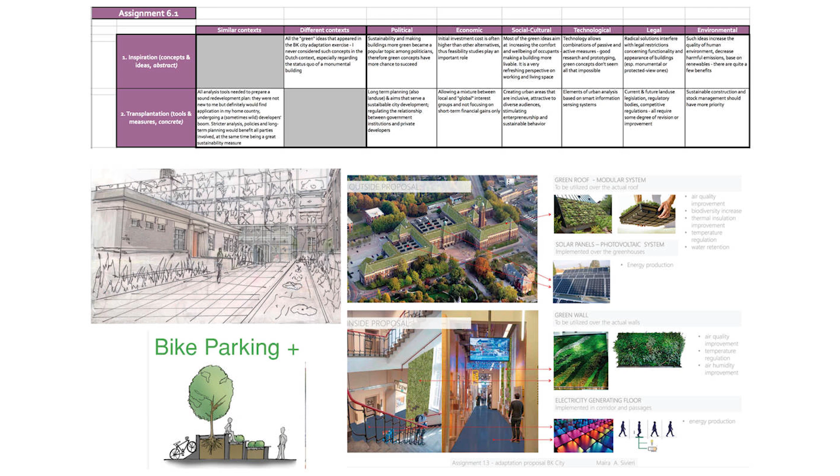Kasia Oegman was inspired by the green ideas of the BK City project, not only because they create a more environmentally friendly building and environment, but also for its social cultural aspects. It increases the comfort and well-being of occupants, making a building more livable. This user perspective is a very refreshing idea, she thought.

Marissa Yamaguchi was inspired by bamboo as a sustainable construction material. She considered this from an economic aspect, as bamboo is renewable and fast-growing, making its cultivation very economically viable. However, in Brazil it would be necessary to develop regulations and do research to determine the strength of the material for construction.

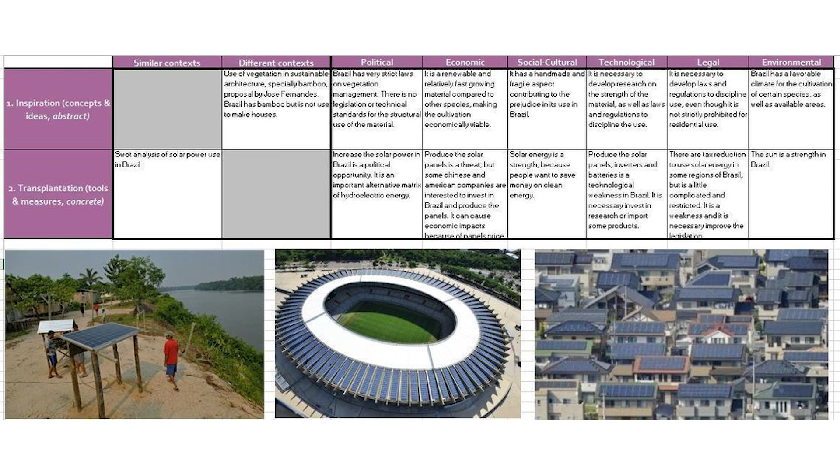Alex Tong was inspired by the adaptive reuse concept of Isabeau, who created a positive residual value with small affordable housing units. This idea could also be very interesting for buildings in Hong Kong, Alex says, where most people can only afford to rent small units. However, he thinks there are many barriers for creating smaller housing units in Hong Kong, like a stigma on living in social housing, the higher financial returns for developers when they develop large apartments, and the lack of government subsidies.

These examples clearly show that contextual differences between countries exist, but that you can still draw inspirational lessons from one place to the other.

Now let's move on to the transplantation lessons, and we discuss some of the tools that you think are transplantable to other contexts. Alejandro Pineda says the stakeholder analysis tool could be used everywhere.

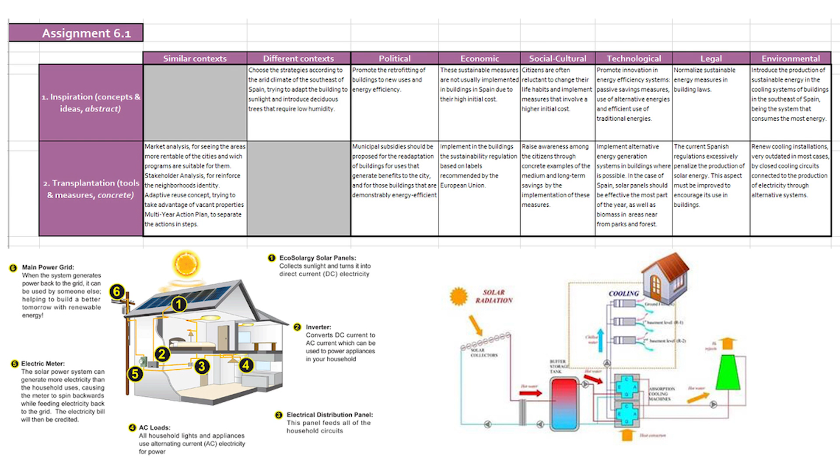He proposes that municipal subsidies and EU labels would help incentivize actors to adapt buildings. And a multi-year action plan could also be introduced to raise awareness about the medium and long-term cost savings by implementing sustainability measures in homes.

Maurizio Papa argues that the conversion meter could be implemented in Italy as well, as housing prices in the bigger cities are similar in terms of price per square meter as in the Netherlands. This is a key factor in determining how successful a conversion into housing could be, Maurizio states. But notice that housing prices often differ between cities, so also between countries.

Margarita Morales Cortes says the conversion meter could also be used in Chile. But she states it still needs to be adapted to the zoning regulations and building construction code of Chile, and the specific city plan in which a building stands.

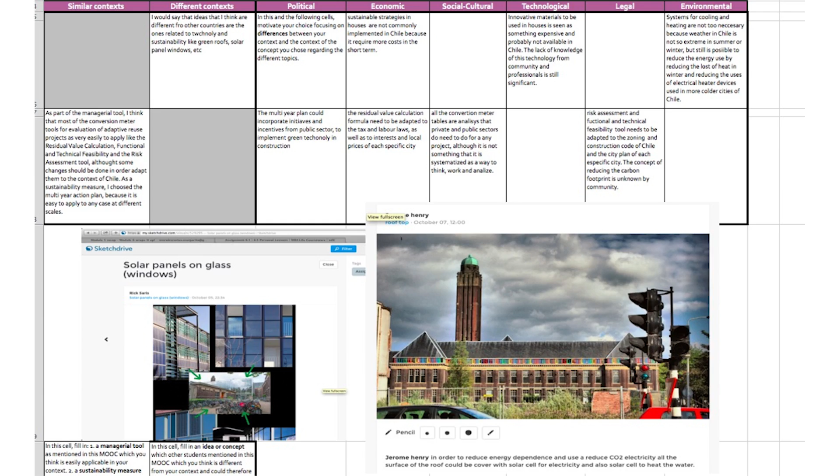We couldn't agree more. These examples exactly illustrate what we mean by using a transplanting tool from one place to another. This applies to all the tools we have introduced in this course. The principle of these tools will be adaptable in any context, but the parameters need to change and be adapted to the local context. Thank you for all the uploads for assignment 6.2.

We would first like to start with a general remark. We got a lot of proposals that included a green facade. We think this is a great idea to make our buildings more sustainable. However, we do have some side notes on this related to management.

Green facades come at much higher costs for developers, and they will need to offset those costs to homeowners or real estate investors, who do not necessarily see the financial benefits of such a measure. Also, the costs for maintenance of green facades is much higher than for a normal facade. These costs are usually initially made by real estate developers, who will need to offset them to investors or homeowners who are not always willing to pay for such measures.

The same situation occurs for solar panels. But for solar panels it's different, because nowadays in Western countries they are usually obligatory to meet energy performance requirements. We would like to shortly elaborate on a few of the submissions we received for this assignment.

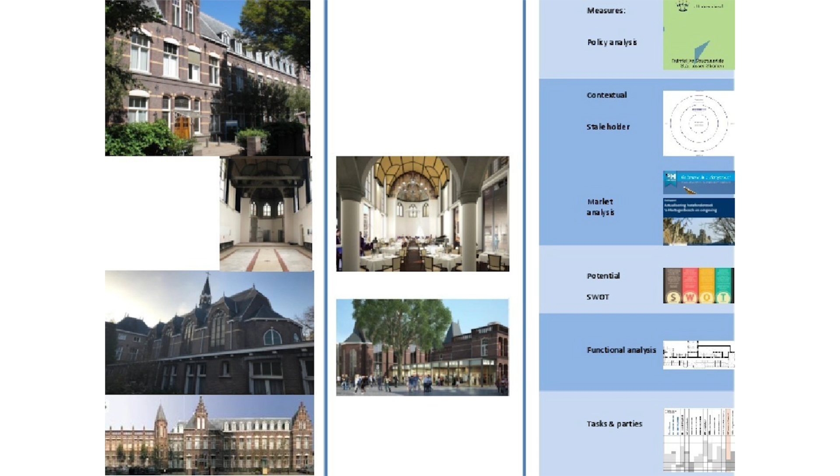This proposal from Kasia Oegman shows a great drawing that visualizes the new use very well, and it definitely does make the building look more attractive. The proposal was very clear on the measures to be taken to make the building more sustainable and fit for new use. However, we do wonder about the retail use of the plinth in this area.

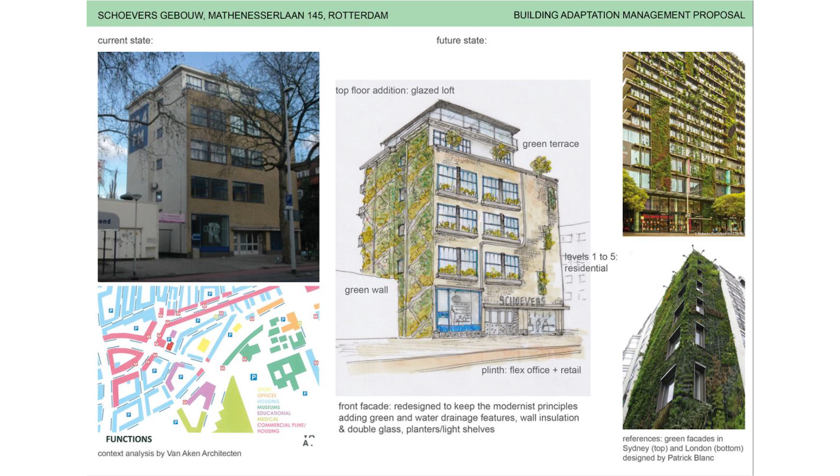We think you need to actually perform the analyses that are mentioned to propose such a use.

Michael Burghardt has a smart building and location choice in an area that's redeveloping quickly, so there's a lot of potential for adaptation. He has good ideas for updating the entire plot, not just the building. Also, a lot of research has been done to support the idea.

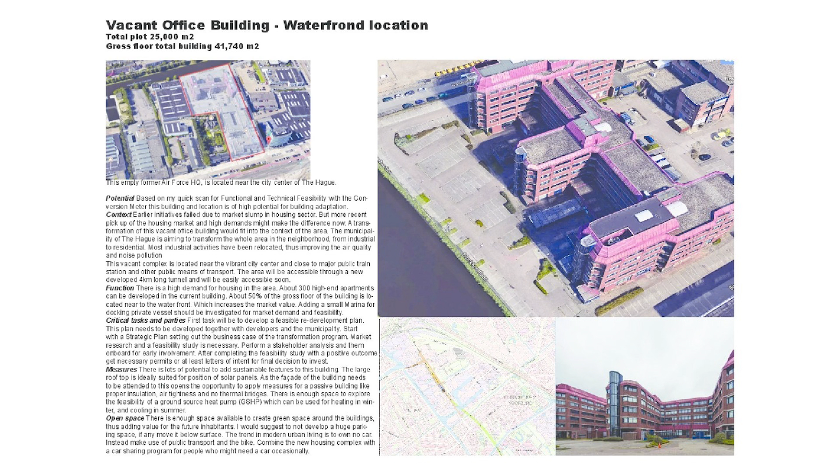To suggest further exploration, we think it would be interesting to think about the internal organization and how to update the facade, since you proposed luxury apartments. If you do so, you need to make the building look more attractive to attract potential buyers.

We would like to close off with Maurizio Papa. He has the most complete adaptation proposal we have received. He chose the tools to make a complete proposal very carefully.

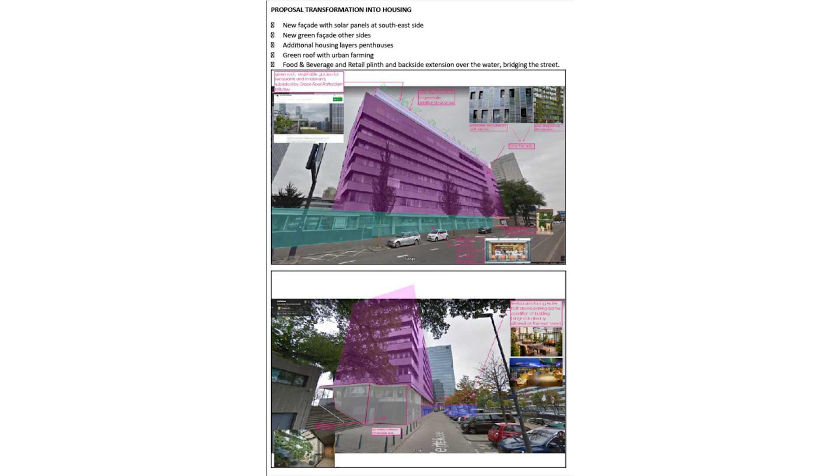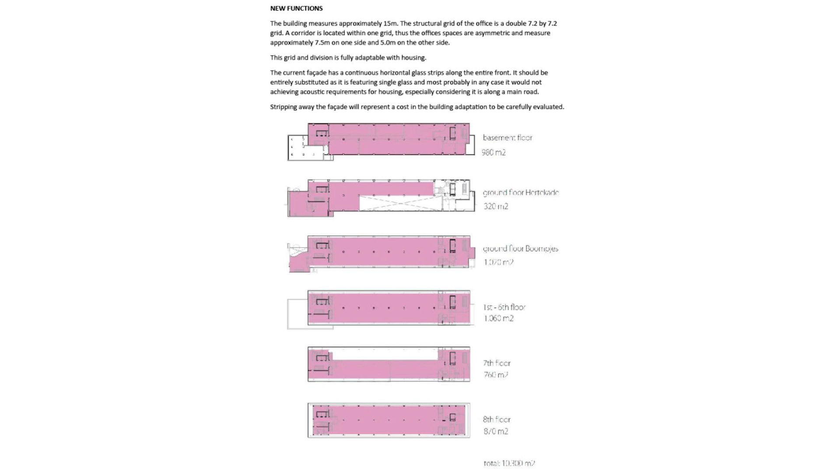There is a great contextual analysis, and he performed very good functional, market and policy analysis to decide on the type of adaptation. This resulted in a very clear proposal for the interior layout of the building, the choice of apartments, and even a network diagram was added that is needed to clarify the entire process.

All in all, we think you understood very well what is needed from a management perspective to make an adaptation initiative a success. You all have great ideas for your buildings, many of which are very interesting, but we missed a proper application of the tools sometimes. A proper application is necessary to make your adaptation realizable. To show us what you have learned from this MOOC, we would like to see more of these tools applied.